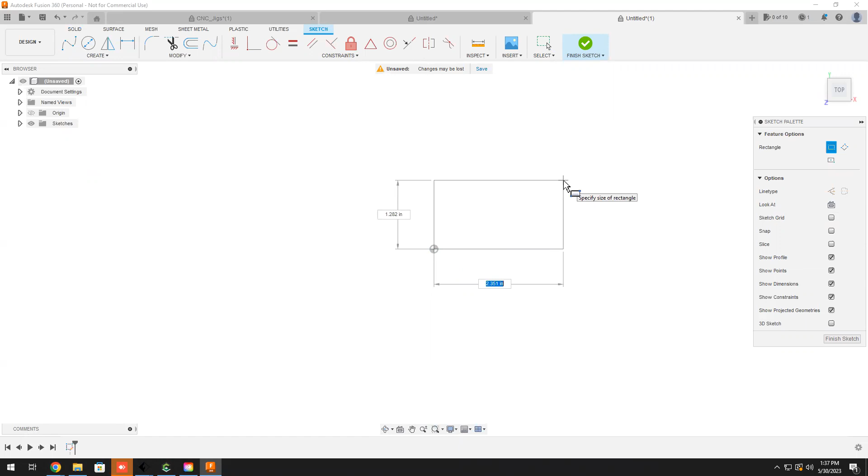And we are going to create a rectangle. We're going to do a 2-point rectangle, and I'm going to snap to the reference point of our origin. I'm going to go 3 wide, hit the tab key to tab into the other field, and we'll go 2 deep. I'll type enter, and now we have our rectangle.

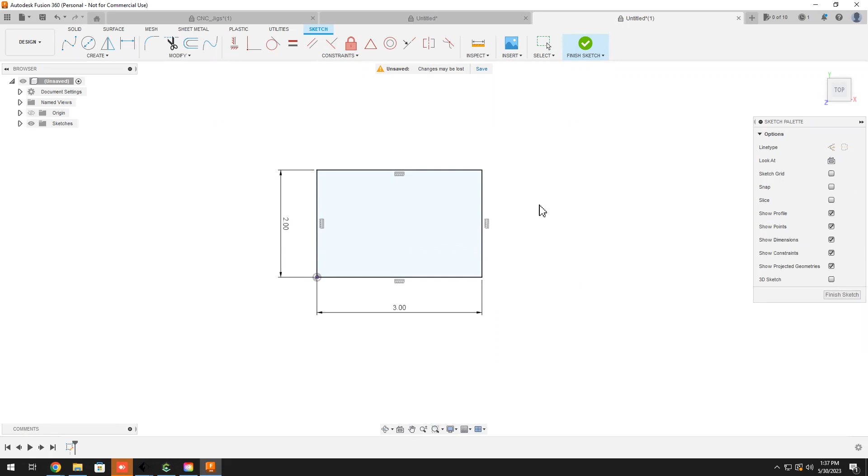I'll slide this center up a little bit. I'm gonna hold my shift key down and my center mouse button just to rotate that a little bit, so we have a little more of a perspective view. At this point, I can finish our first sketch.

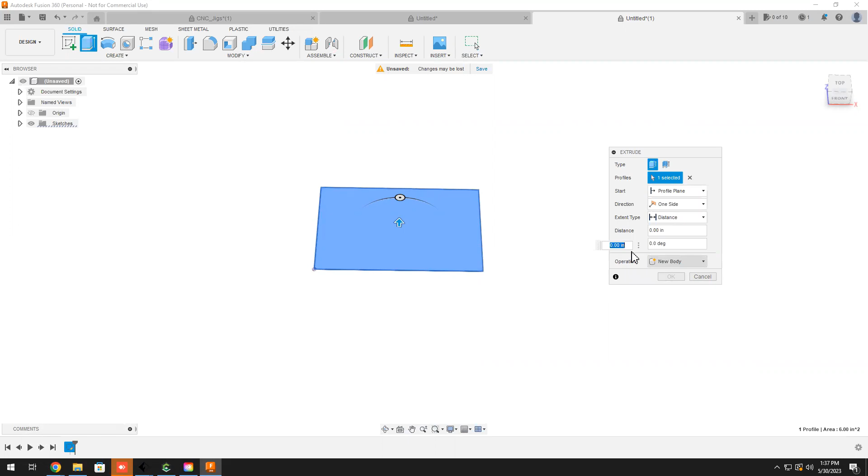I'm gonna select this face. I'm gonna type E for extrude. I don't need to set my operation. I can just type in 1 inch. And here we go. We have a 1-2-3 block with no holes in it.

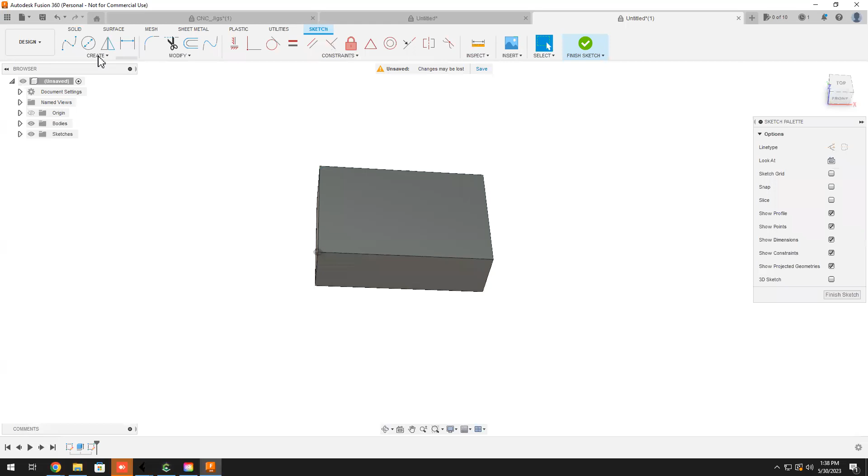So now we want to create our holes. To do that, we're going to create a new sketch on the top face, and I'm going to make 2 reference lines. So I'm going to go create line, come over to my sketch palette, and choose construction as my line type.

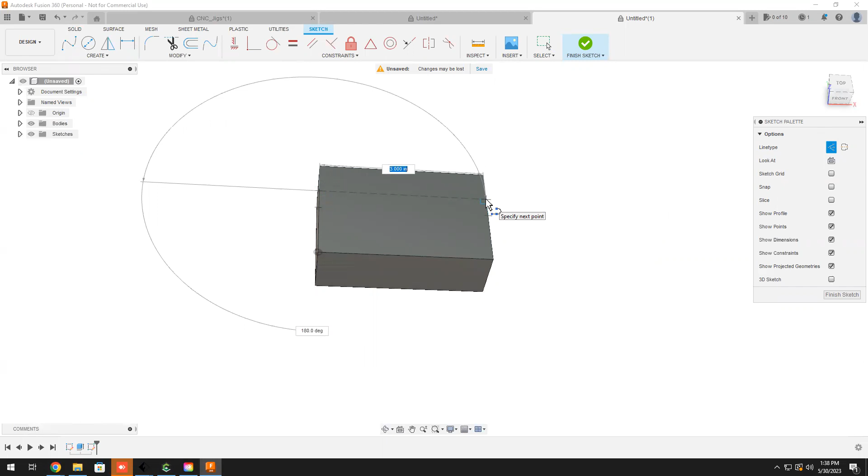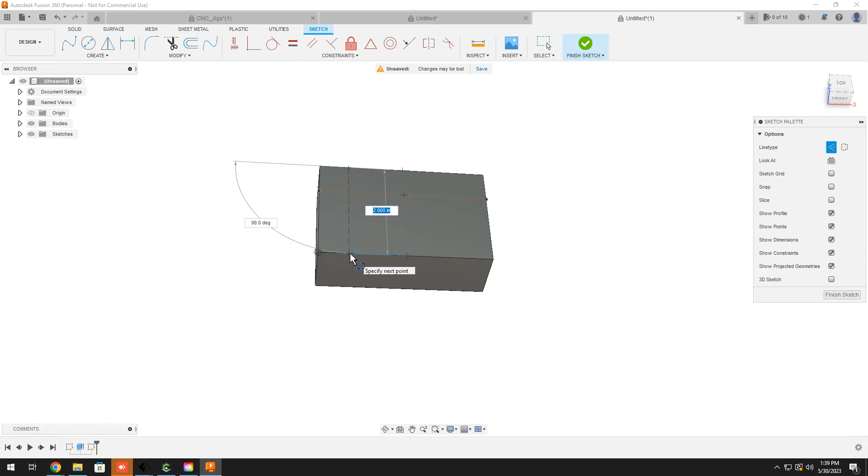I'm just going to draw 2 lines at this point. I want it parallel to the edges, so you can see I have the little right angle box telling me my new line is perpendicular to that edge, so I'm happy with that. I'm still in create line mode, so I'll draw my second line anywhere. At this point, I don't need to place it exactly where it's going to end up. I want to make sure I'm parallel with the edge, so I can move this around till I get my little right angle icon to appear, and click it. I'll type escape to get out of the draw line mode, and we have our 2 lines.

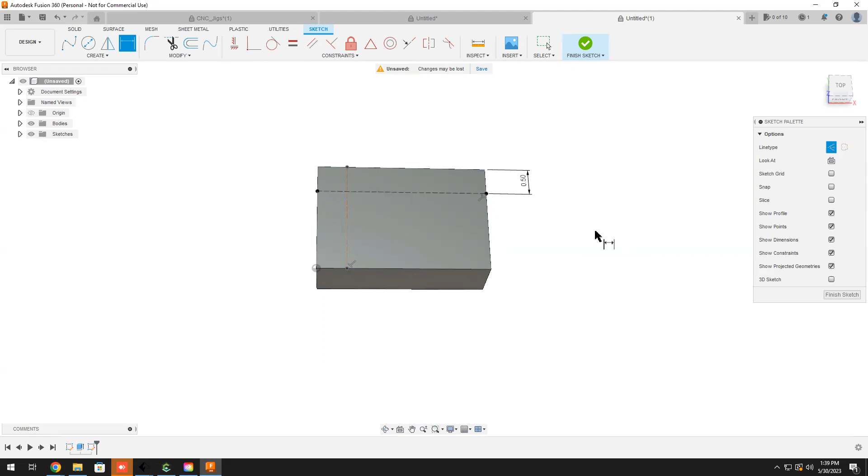Now I'm going to dimension those to be 0.5 inches offset from the edge, so my intersection of the 2 lines is a 1/2 inch offset from each edge.

Now I can create my circle, and I believe the diameter of the circles in a 1-2-3 block are 3/8 of an inch. We'll do a center point circle, and this is why I drew my lines, because now I have a place I can snap the center of my circle to. As soon as that snaps to the center, I'll click it and bring my circle out, and I'll just type in .375.

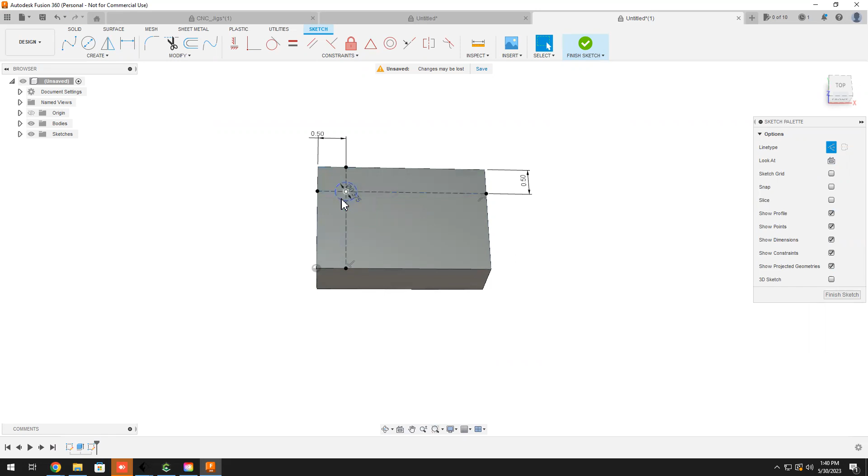Now that drew a construction line, and I don't want that to be a construction line, so I'm going to select it and turn construction line off over here. So now I have a solid blue line.

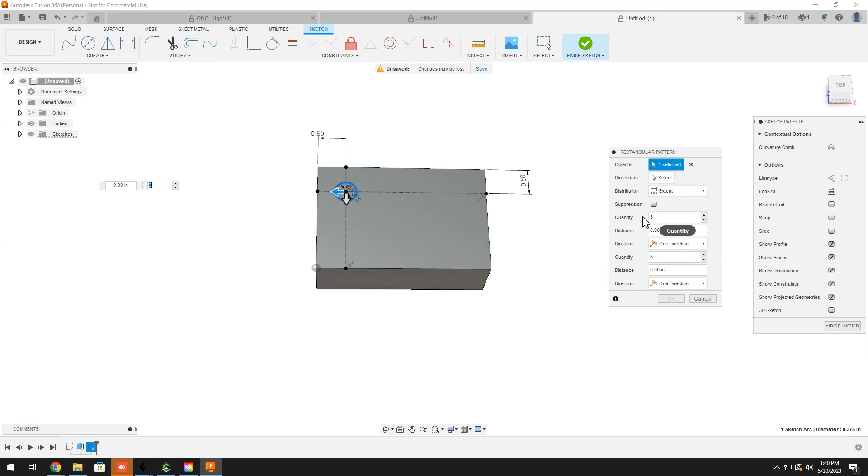I still have the circle selected. I'm going to come to create rectangular pattern. I believe my top number is going to be across. Yes, so we want that. I just drug that out a little bit so I can more easily see what's going on, and I'm going to tell it I want 5 circles across and then 3 down. So now we have a pattern of circles.

I can kind of get that rough to where I think it's going to be. We could do the math, but I kind of cheated here, I just drew it over, drug it over. And I kind of had the idea in my head that it's about 2 inches. So I was right, Fusion proved it for me.

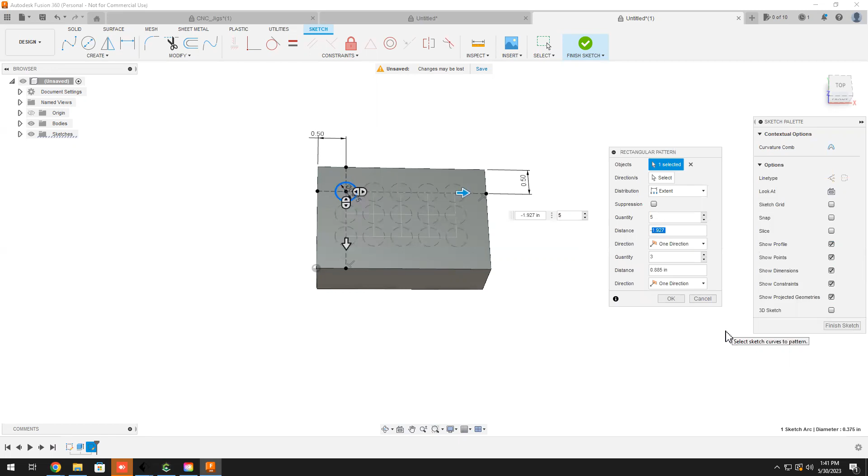So we want this number to be 2, and we want down, I believe we want that to be 1. And then I can hit enter. So there we have our array of circles.

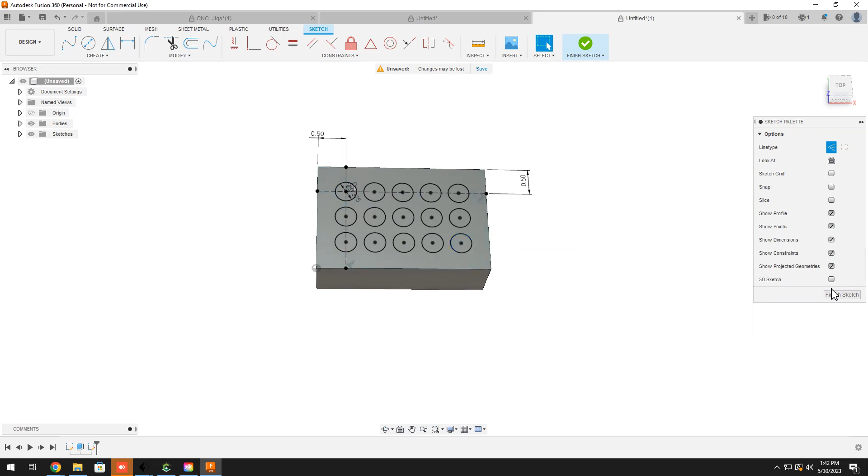At this point, I can finish the sketch. And I can select each - I'm going to hold my shift key down and select each individual circle.

Maybe there's an easier way to do this. If you know, leave it in the comments.

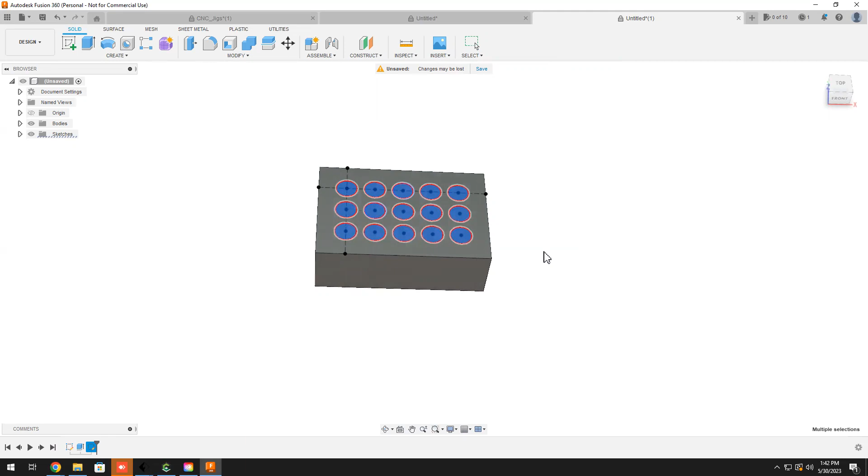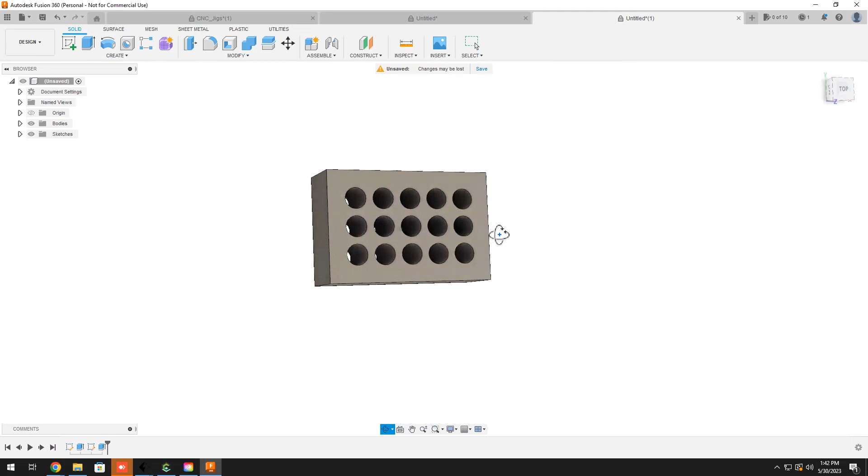So now I'm going to type E for extrude. Again, I could change my operation over here, but I don't need to. If I just pull it down, it's going to cut, automatically switch to cut. Say okay. Wait for the computer to catch up. So now we have our 3/8 holes all the way through our body.

I could thread these. I could select these faces. So some 1-2-3 blocks will have threaded holes.

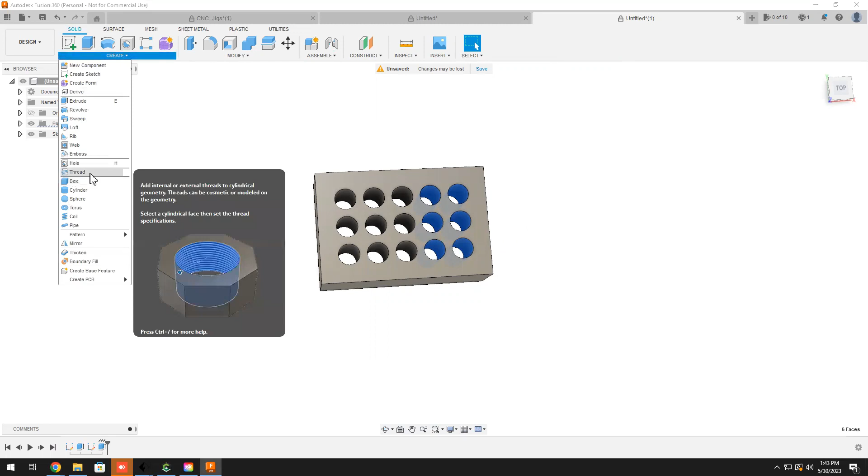I'm not going to spend a lot of time on threading today. I have another video on my channel about making threaded parts. But we could select those and come over here and create threads, and as simple as that, thread all these holes. Not going to do it for this video.

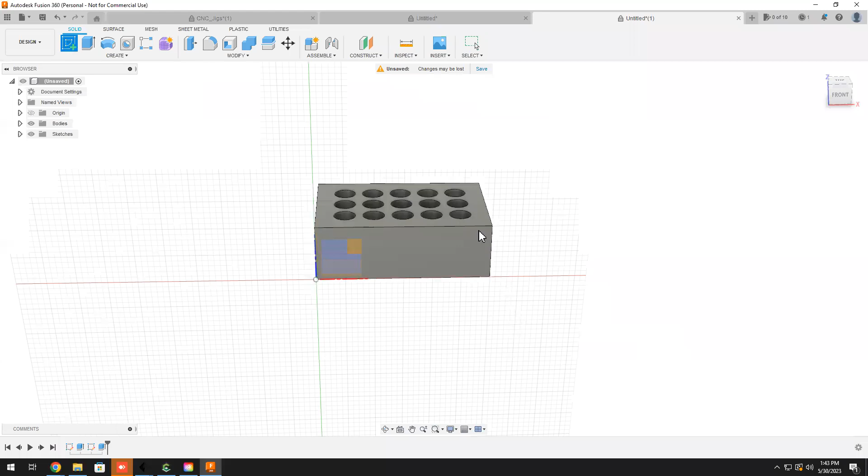So now we need to make our holes on our front face. We're going to create a new sketch by clicking Create Sketch. Select this face, create line. We're going to go to the center. So you see the little triangle that popped up? That's telling me I'm centered between the two edges.

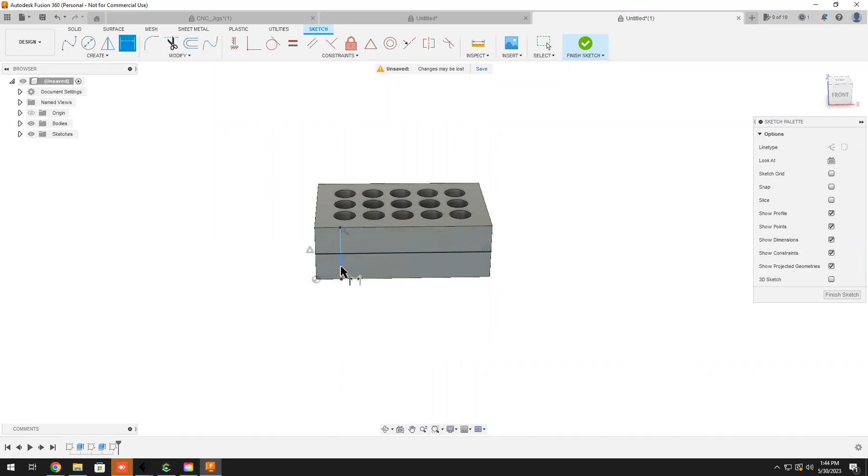And I'll drag that over and set my line. I'll make another line here. This line will need to dimension. I believe that's going to remain 0.5.

And again, we need these to be construction lines. So I'll select them both, turn them into construction lines. Create a circle.

.375. I could set this number because I'm using it over and over again. Any dimension that you use repeatedly can be set up as hit enter there too. Let me show you, can be set up in your parameters, so you don't have to remember the number. I could just record it in the parameters table and reference it. I'd call it hole diameter, for instance. But I wasn't thinking far enough ahead for this to do that.

I believe one of my videos talks about setting up parameters. Maybe we'll do another video on that. But for now, let's continue with this.

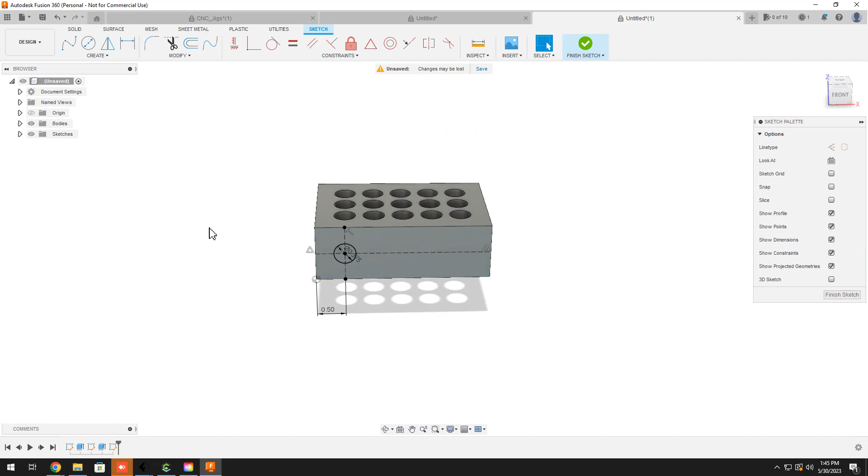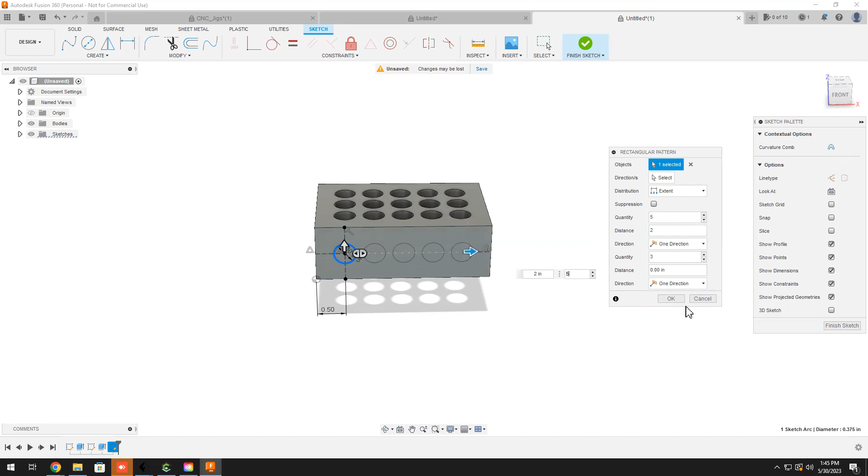I'm going to select that circle, create rectangular pattern. Again, I'm going to drag it over there just so I can kind of see what's going on. I know I want 5. Kind of get it close, and I know it's going to be the same number as on the top, 2. And we'll say okay, we're not going to do any vertical ones.

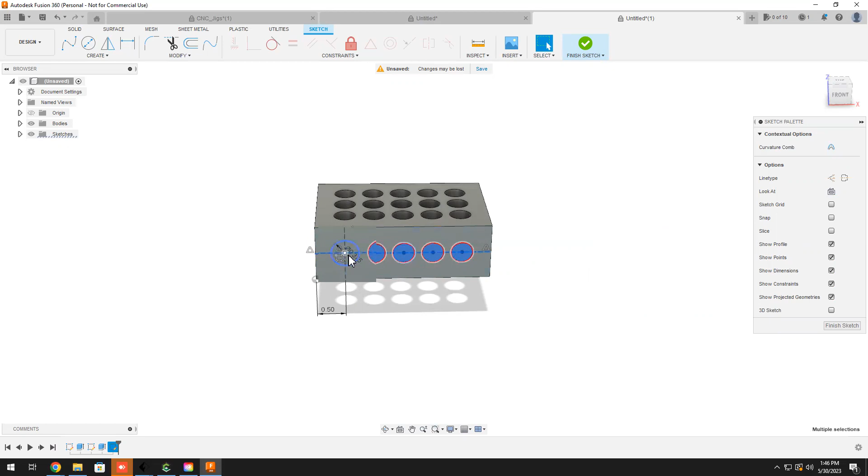Again, we're going to select all the circles on the inside. E for extrude, and we're going to push those through. There we go. Now we need to do the same here on our edge, or on our side, I guess.

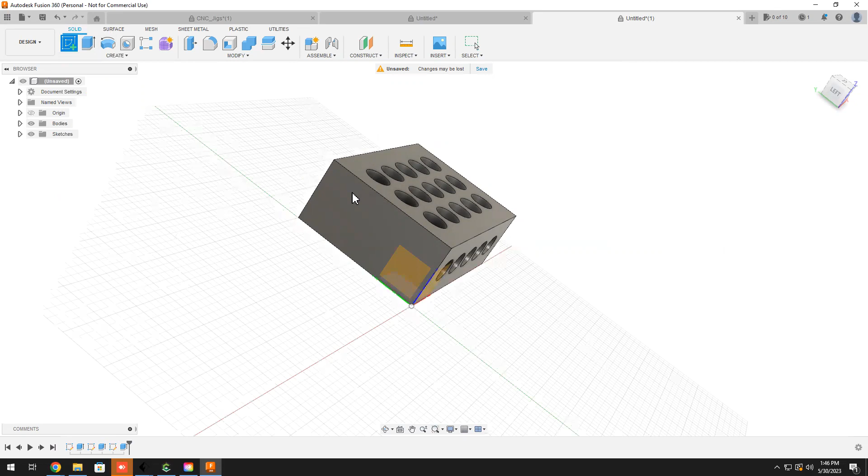We're going to create a new sketch. On this face, we're going to draw another center line. We want that line to be construction line. Create another line, another construction line.

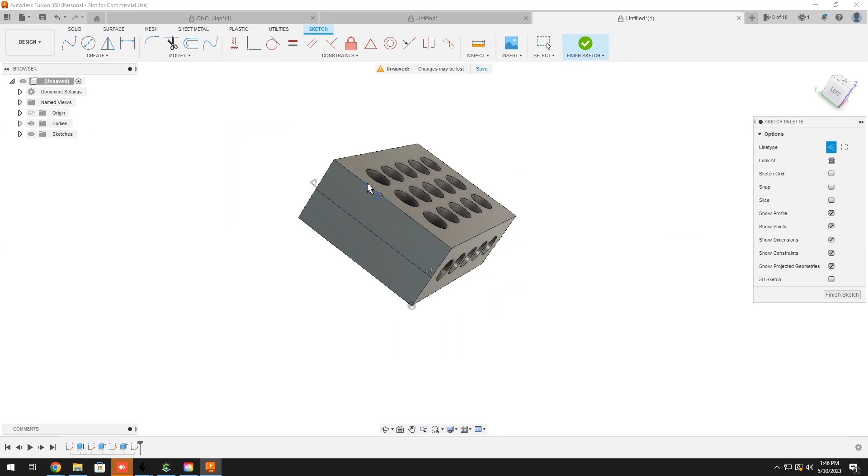This one we need to dimension to a half inch. Draw our circle, we're going to snap it to that intersection there. 0.375. Don't want the circle to be construction, we want it to be a solid line.

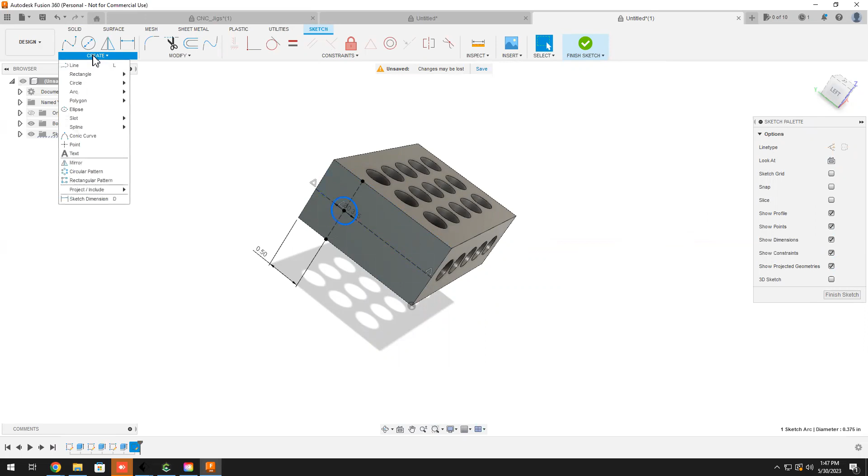While we have it selected, we'll go ahead and create a rectangular pattern. And drag it over to just about where we think it goes. And go ahead and type in the exact dimension, which is 1 inch. Click enter.

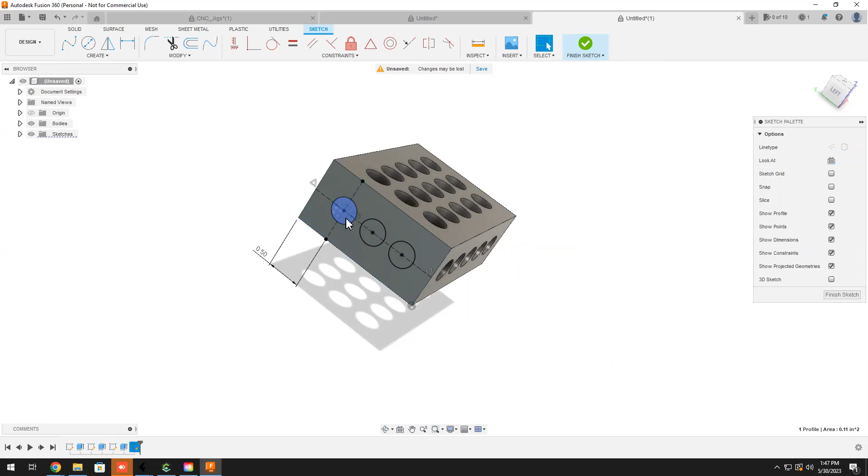Hold the shift key down to select all 3. E for extrude. Cut our holes. Say okay. And there is our 1-2-3 block.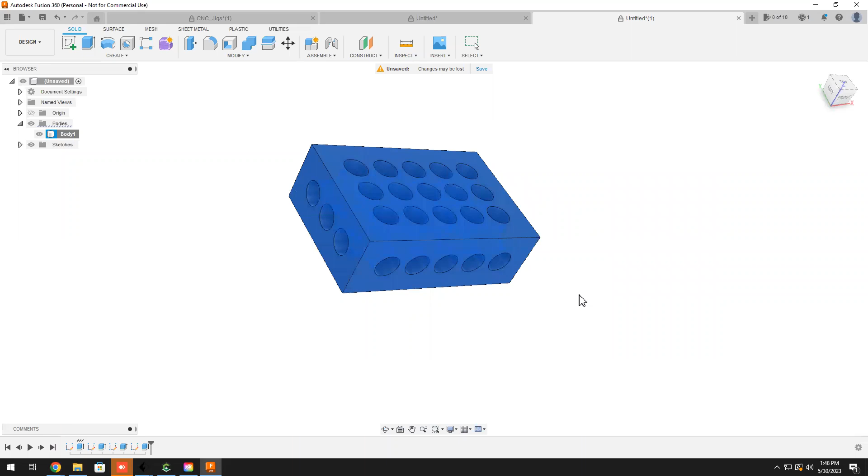At this point, we could export the body, do a save as mesh. Call it a 1-2-3 block. Now I have an STL file of this. I could 3D print it. I might even try that. I'm not sure, 1-2-3 blocks are pretty inexpensive, anywhere from $10 to $20 for a set of 2. I don't know that it'd be worth the time to 3D print a 1-2-3 block. Maybe I will try it.

I don't know, but the purpose of this today was just to use the 1-2-3 block as an example for patterns and how to use them. Pretty simple stuff. I hope that helps you get going in Fusion.